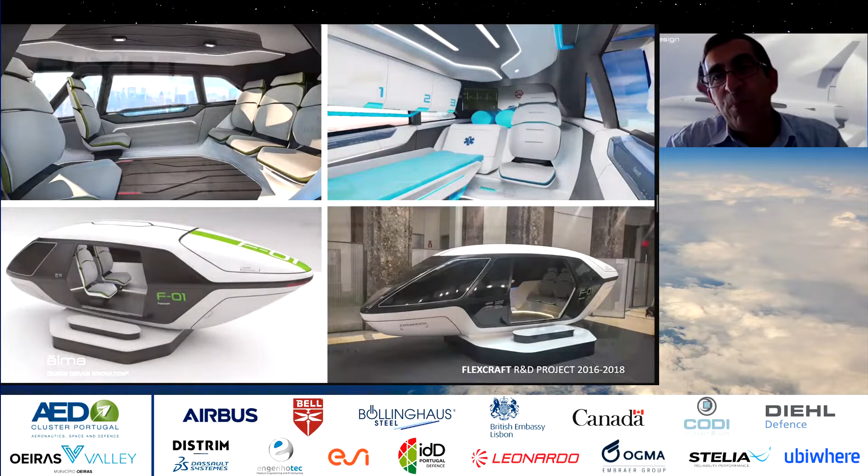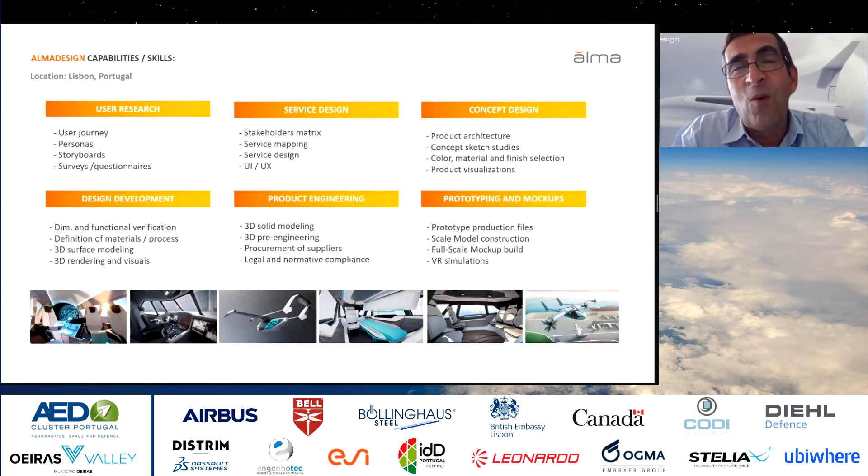Currently, the Portuguese ecosystem is working on what this area will be in the next years. And so, again, we are building consortia to work on future trends so that the local supply chain can enter these projects in the future. My last slide is about what we consider the future of aeronautics and the trends that we foresee at Almadesign. So we are expecting a seamless mobility experience, and this is about air, land, and sea, not only aircraft, but how they interact with the whole ecosystem.

Second, decarbonization and zero emissions, be it electrification or hydrogen. There's a lot of work to do in those areas. Urban and intra-urban air mobility, which I've already talked about, be it passengers or cargo. Supersonic flights, which is strange to see when we are thinking about decarbonization, but that's also a trend that is going on presently. Structural health monitoring and IoT, but Gustavo will talk more about this for sure. Advanced materials and additive manufacturing, resilient dynamic supply chains, and reshoring.

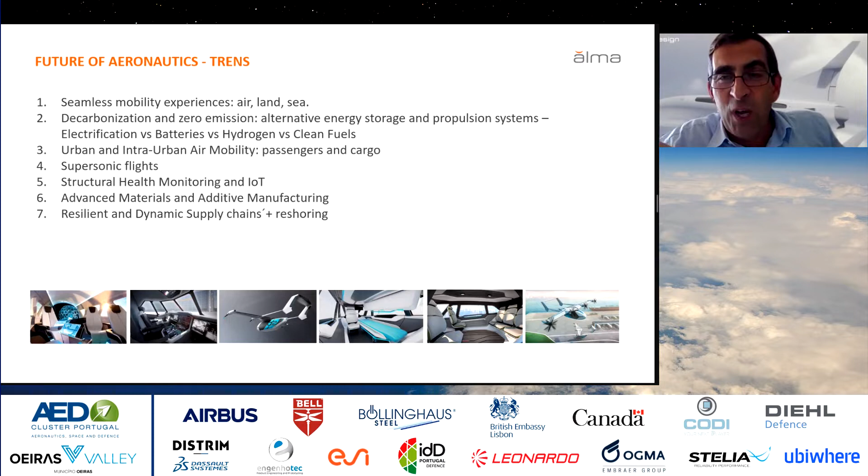Think about this. The crisis has brought all the companies to rethink who they want to work with on their future projects, such as Portuguese engineers and the Portuguese supply chain. Then finally, autonomous flight systems and artificial intelligence. That's what we have been working on. So this, in the end, will lead us to new aircraft and to new models of operation.

And what I think is important, if you think about going into the area to work, is to think that the future is not about what you have seen in the past, it's about new configurations, new models of operation, and you have to be prepared to approach these new sectors. Rui, this is pretty much what I could say in a nutshell about Almadesign and the future trends, and I hope this is inspiring for the audience.

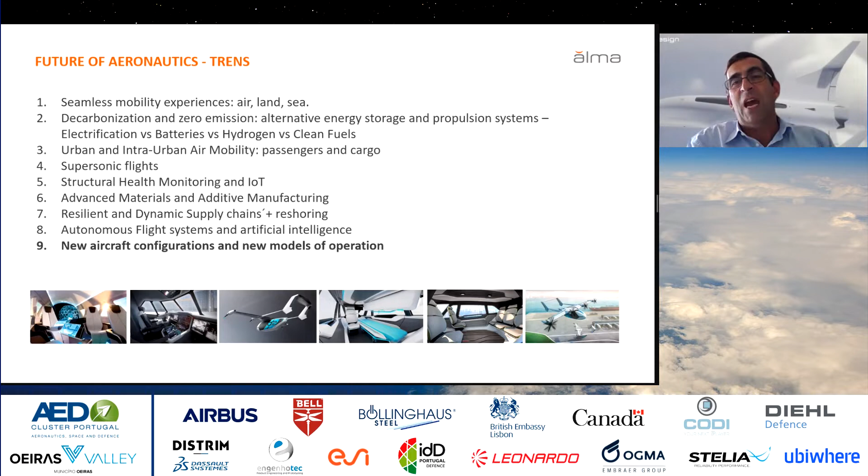Thank you so much. Thank you, Rui. For sure, it will be.

I mean, you have left a couple of very important key messages, of course. My objective in inviting this panel was really to show everyone that we have moved on from the build-to-print approach of decades ago, and we have climbed up the value chain ladder and really are at the design and engineering level, which of course is very important, because having some champions within design and engineering, then, as you said, we can also bring the rest of the ecosystem into play.

And I think you're showing that we are doing more than that. I mean, we are even at R&D, really shoulder to shoulder with the big ones, exchanging ideas, discussing ideas, trying to find new concepts. And so I think it was an excellent presentation to show everyone what's on the table in terms of opportunities for all who are considering getting into aeronautics.

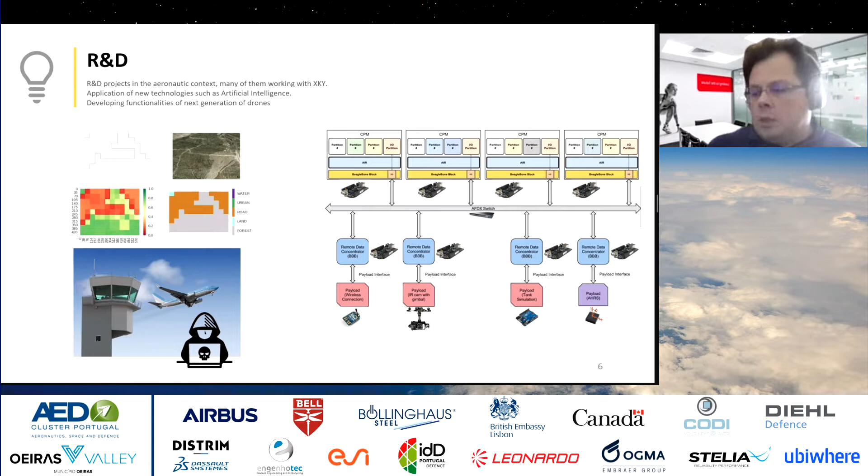So this is just one of the perspectives that we are working on. The other is our operating system. I just put these images here because it's basically what makes our operating system so different from the others. It's based on IMA. That means that we have space and time partitioning, and that could be a very simple idea, but in aeronautics it's really important.

That means that we can have several applications working on the same hardware. So we don't need so much hardware, we can save space, we can save weight on the airplane, and of course we can also save power. This is more and more important every day that passes.

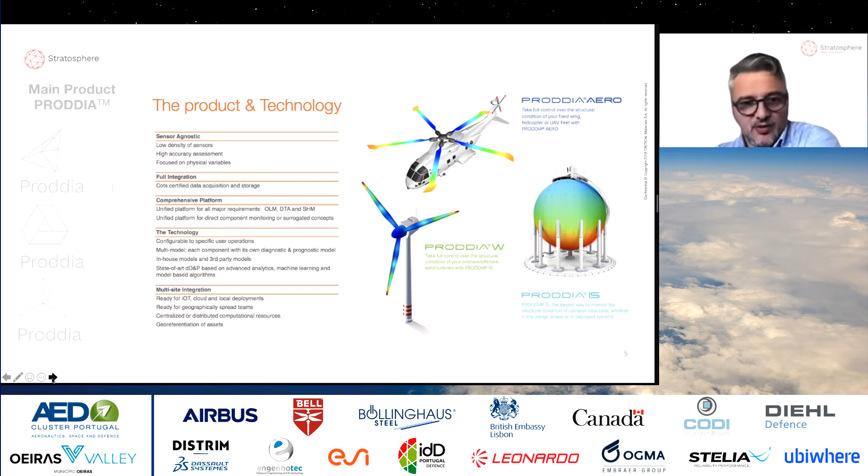So the product also has a very powerful IT behind it. It can be deployed in IoT platforms, in the cloud, or in the customer facilities, and can work with several servers and interact with several dispersed geographic assets. So this is one of the things that is also interesting in the system.

The system is patented. It is an umbrella patent that was awarded to us in 2012, and keeps going. It's prior art of some of the key OEMs in terms of aerospace in the world. Our patent is referenced by them as prior art.

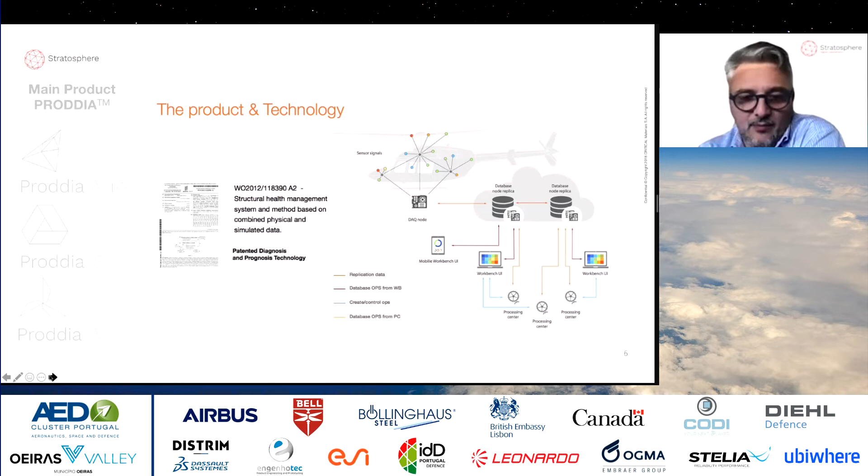So in a nutshell, we have PRODDIA Aero, which is very focused on deployment of this type of technologies in UAVs, fixed wing aircraft, helicopters; it can be deployed in any type of platform, it is not platform dependent. And also PRODDIA IS, which is focused on complex structures, that can be a pressure reservoir, a complex tower, something related with a complex and critical behavior of a structure. And of course, as I mentioned earlier, we have PRODDIA W, which is more focused on the behavior of wind turbines.

What are the technologies? So we work strongly with digital twins. For anyone that doesn't know, a digital twin tries to blend sensor data, integration, and analytics into a digital model of something. There are a huge amount of visions about digital twins. Our vision is more physics based.

We try to mimic the behavior of physical systems using data that comes from the system operationally, and use that data, that normally is scarce, to be able to predict other behaviors in the system using the digital twin. Other behaviors can be at different points of the system or at different moments in time, and can be both at the same time. So we work very deeply in digital twins.

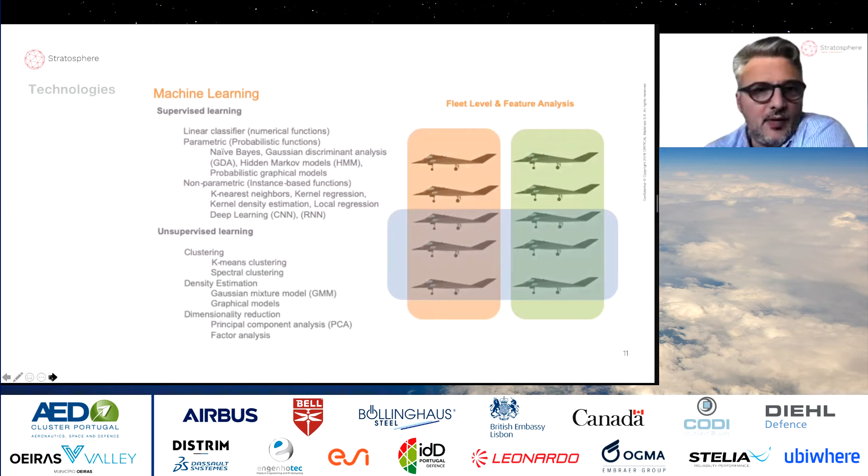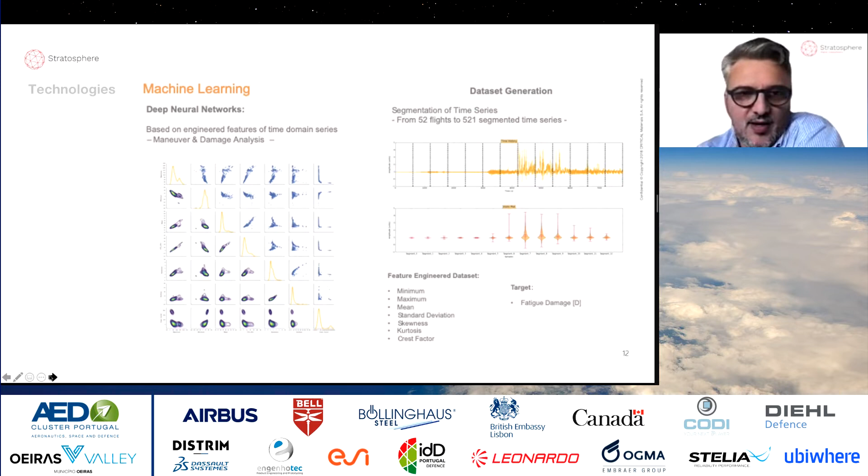We can use this type of technology to do a lot of things, but in this case, from flight maneuver data, we train deep neural networks so that the network is able to pinpoint if a specific aircraft or a specific flight has generated a very harsh maneuver automatically, based only on its specific acceleration profile. So we can analyze in great detail the flight profile of any aircraft if we have the right data, using neural networks. This is an interesting application.

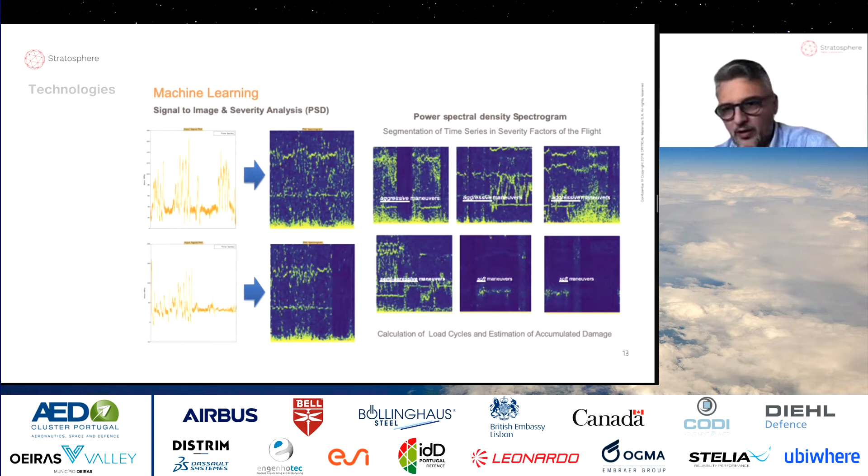How we do it: we transform the signals into images. In that type of image, an aggressive maneuver has a certain type of behavior, less aggressive maneuvers don't have it, and soft maneuvers are completely different. From that, we use this information to train neural networks to analyze it. So we have very deep knowledge in signal analysis and everything related to this transformation.

We are also investing heavily in augmented reality. Probably in the near future, one of the releases of PRODDIA will have an AR capability for commercial use. The main objective here is to map the results of damage and superimpose them in real time on real aircraft wherever they are. So the maintainer can put the goggles on and see the status of the system or each component, and even see the behavior of systems that are hidden from normal sight. So we can see inside using augmented reality.

Augmented reality is a technology being used in a lot of things. In this case, we are trying to apply it to damage analysis and damage detection, and other data can also be added to the information it provides. Of course, this works on top of the analytics we are already providing. Without the analytics, augmented reality doesn't make much sense. It's a way to deliver the results more efficiently. Okay, that's our perspective on this.

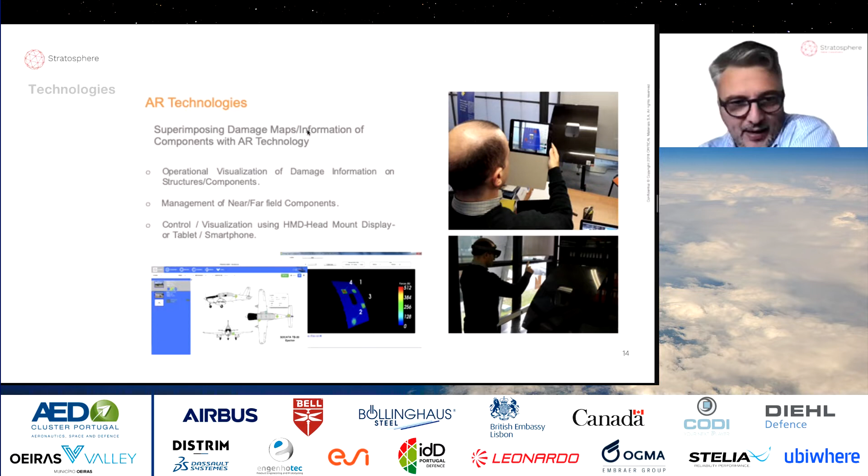How do we deal with this? In any type of aircraft, we need sensorized systems, and we need data acquisition and data processing. Normally, we'll try for it not to be very heavy on board, so we'll try for it to be as light as possible. And we can use the same sensor set and data set to do a lot of different things using the same information.

So we can work on what we call life extension, to analyze how the life of the platform is being consumed. And there are mainly two strategies. One is more on operational load monitoring, to analyze time history, exceedances, and statistics from specific load distributions. Another, normally more interesting, is more on the fatigue and fracture side: we can estimate the life in fatigue or in fracture, or both mixed, per each component in each platform. And we can provide an estimation of damage progression, and from that, we can estimate the useful life of the aircraft.

And on the other side, with the same type of sensors and sensorization, we can work into a more advanced analysis. HUMS, more focused on rotary wing, on helicopters, which typically is more data-driven: system identification, machine learning, and data fusion, focused on specific aspects of the helicopters. And the other, more generic, we call SHM, which is focused on diagnosis, location, and also severity of the damage, and also prognosis based on that.

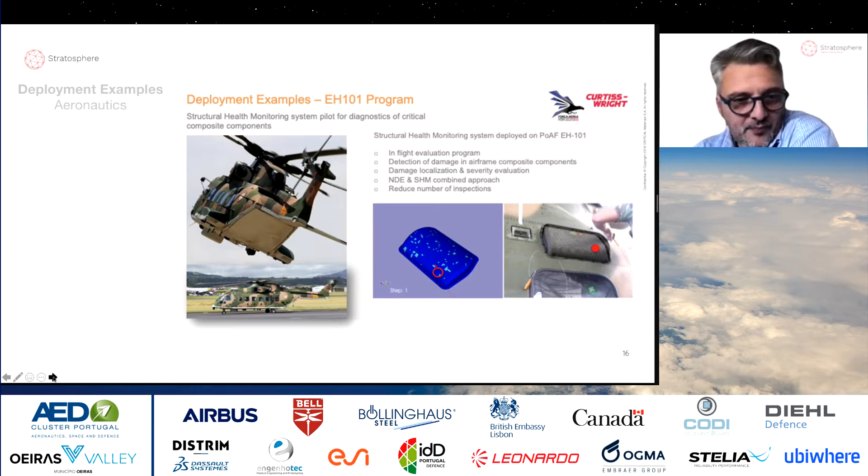Another thing also with the Air Force, the TB30 program, where the trainers are being monitored by PRODDIA in an implementation similar to the one that I explained, more focused on damage tolerance analysis and fatigue life. And the idea here is, of course, these types of aircraft are trainers, and the pilots that fly them are in the early stages of piloting. So they normally abuse the aircraft a little bit. And this is important to keep the fleet as healthy as possible.

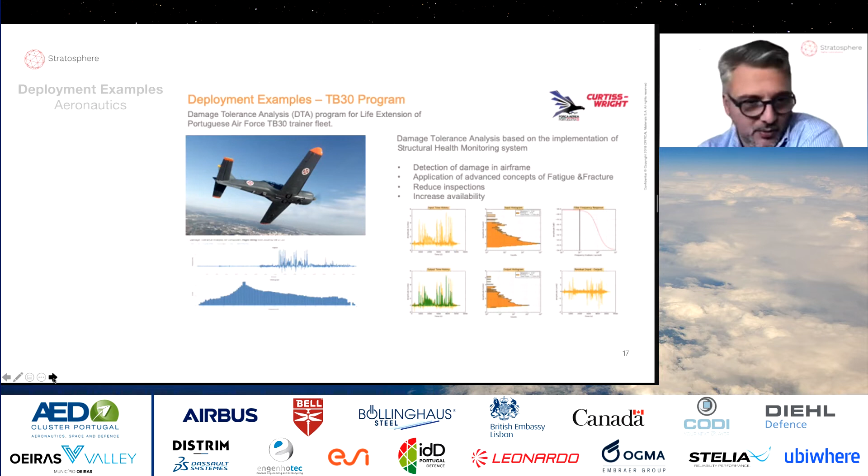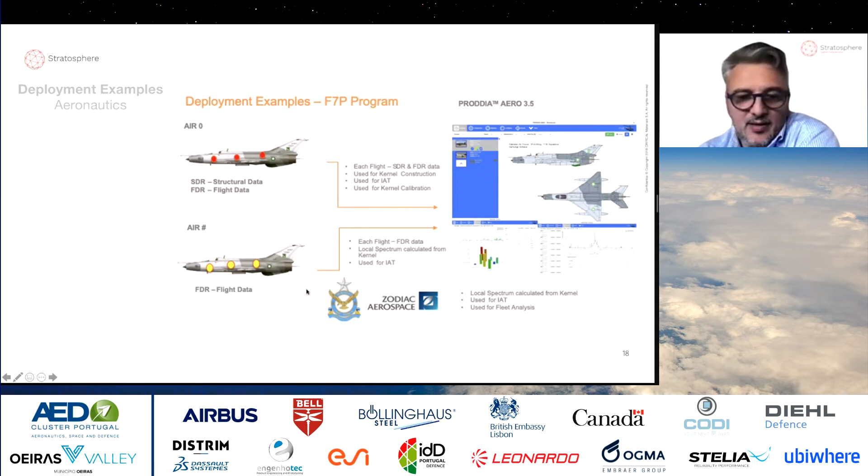Another example, one that is being finalized, is a program with the Pakistani Air Force for the F-7 program. The F-7 is a variation of the MiG-21, still in operation, made by Chinese engineering, and they are extending the life of these platforms in Pakistan, and PRODDIA is one of the base technologies that supports the life extension of the F-7 program. This was done with the Pakistani Air Force and also Zodiac, which is now a Safran company.

And some interesting results for the future. We are working on Pássaro, which is a very demanding project led by Airbus, and in Pássaro we have responsibility for the SHM work package. In this case, we are working mainly with piezoelectric sensors, not accelerometers, not extensometers, but PZT. And we are analyzing impact detection with PZTs that are spread around. Imagine a plate, and we have a real impact, and the algorithm will run the data that comes from the PZTs and try to guess where the impact is.

So in most of the cases, you have impacts, but the impacts don't have the energy needed to do damage, really, okay? And this means that the analyses are different and can be done in parallel. First, detect if there is any impact or not, and then after a while, detect if that impact has generated any damage or not, okay? So it can be something related to that.

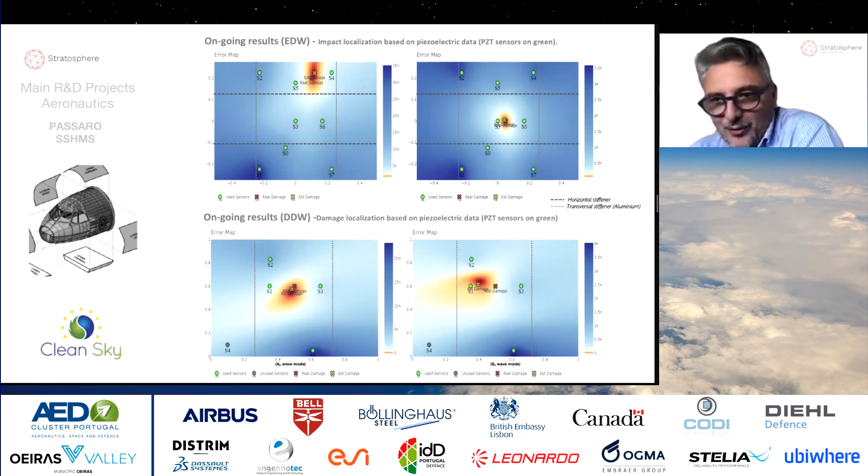So a little bit about the future. Probably cockpits of the future will have this type of technology on board. That's what we expect. So let's see and hope that we can go there. We are also working in other areas. In this case, we are working with this interesting consortium to be able to monitor the repairs of structures.

Imagine that an aircraft has a certain damage, wherever it is. Typically, the maintenance will repair that part of the structure with certain methodologies that typically are approved by the OEM. What we are trying to do is to include monitoring on that repair. So the repair brings some kind of monitoring of its status, and that can also help them to analyze the status of the repair throughout the time of operation from when the aircraft is repaired. So this is also quite interesting in that regard.

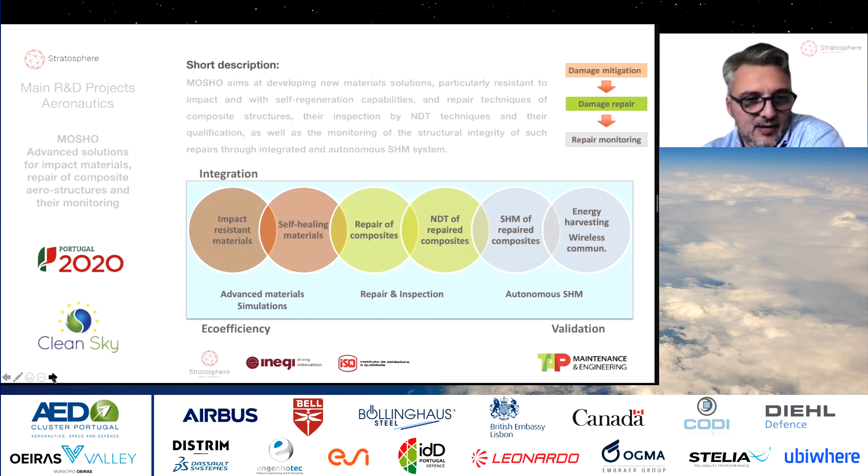Okay, thank you very much, Gustavo. It was an excellent presentation. I did work some time ago a lot with simulation, and for me, it's always amazing how things are progressing and all the new things that we can do at the moment. Another thing that is clear is a lot about artificial intelligence, machine learning, augmented reality. A lot of things going on in the digital realm, where here in Portugal, fortunately, we have good human capital, and we can see that a lot of companies are using that to make different products and to differentiate. So I think that's also a key learning from your presentation.

We are almost out of time, but I don't want to leave without some questions. I would start with João. Since we are on AED careers, the questions are more focused on human resources. What is your perspective in terms of the students? Of course, you need different levels of expertise. You for sure get a lot of students that come from university. How do you think they come prepared? Do you have any advice for them to get prepared for the real world? Is there a big gap between the knowledge given in university and the knowledge that you need in the companies, or have we been reducing that gap? What is your perspective on that?